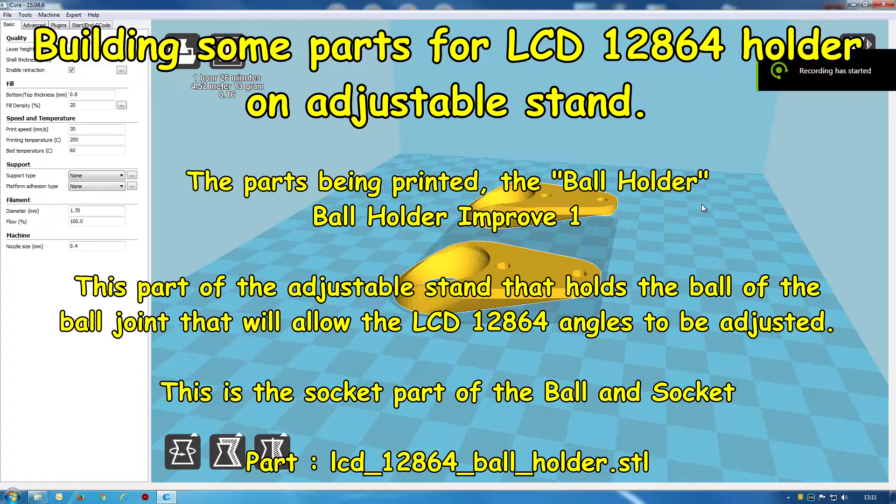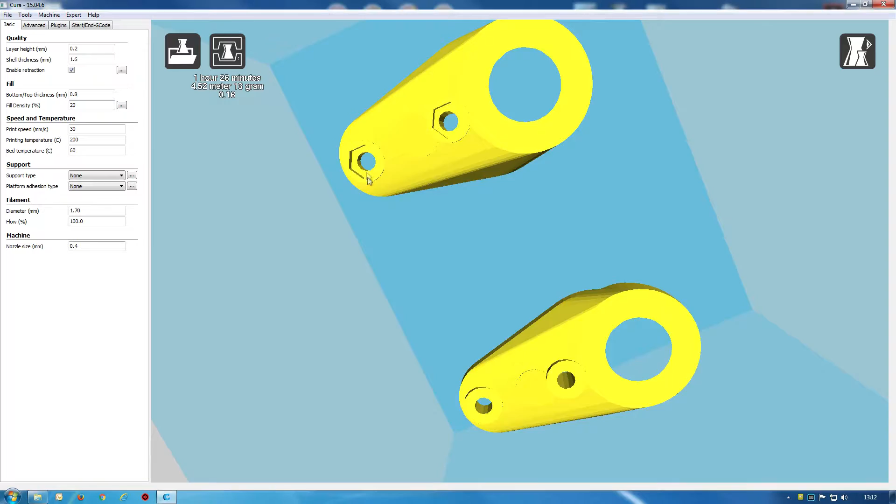I've made some changes to this ball holder part. I've chopped quite a bit off so that the ball joint can move left and right a bit. I've changed the parts here so that a hex-headed 4mm bolt will indent into there. It's got a hex shape.

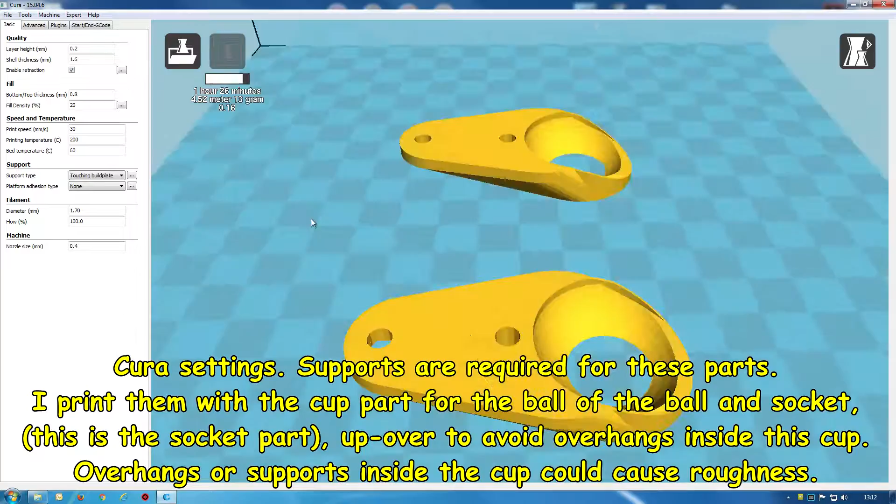On this side there'll be a nyloc nut. This is the way you want to print it, but with supports on, by the way. You do need supports on. Touching build plate. Okay, when you're printing it out.

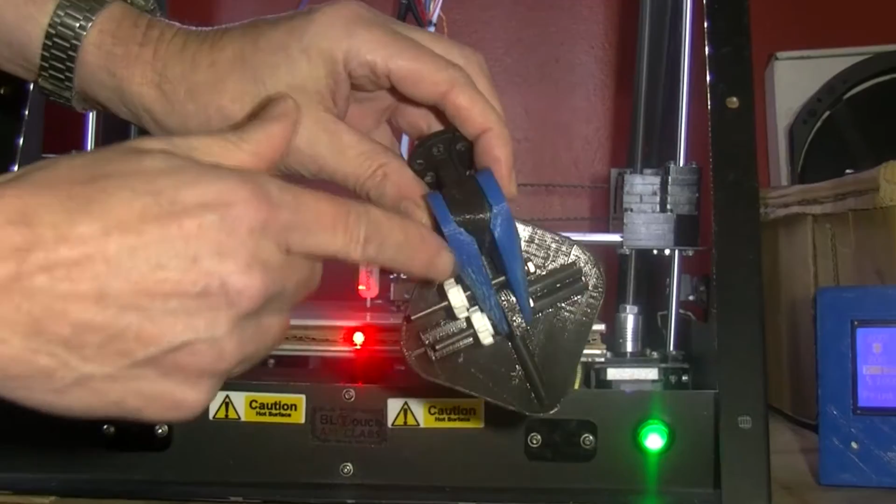This is going to be the improved LCD12864 ball holder. That is this blue part here. On this print I've actually designed it so that this opening will be as wide as it shows you here. I've broken these off manually, but in this next print it will be better.

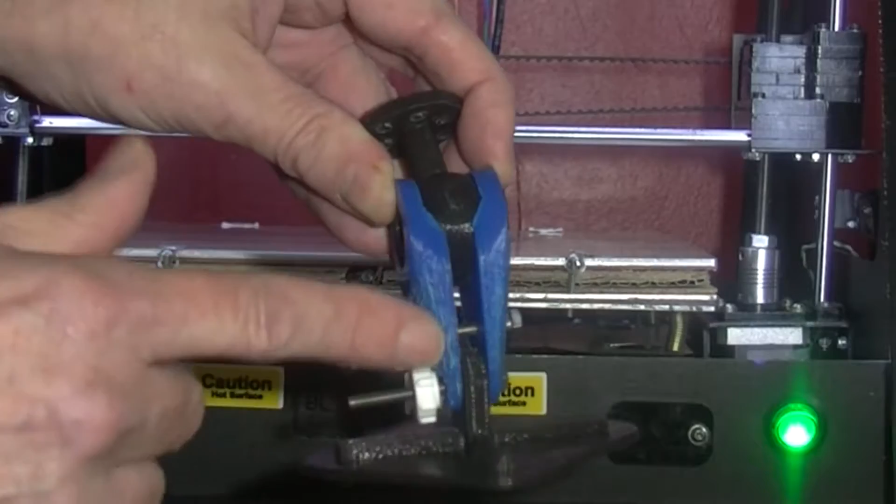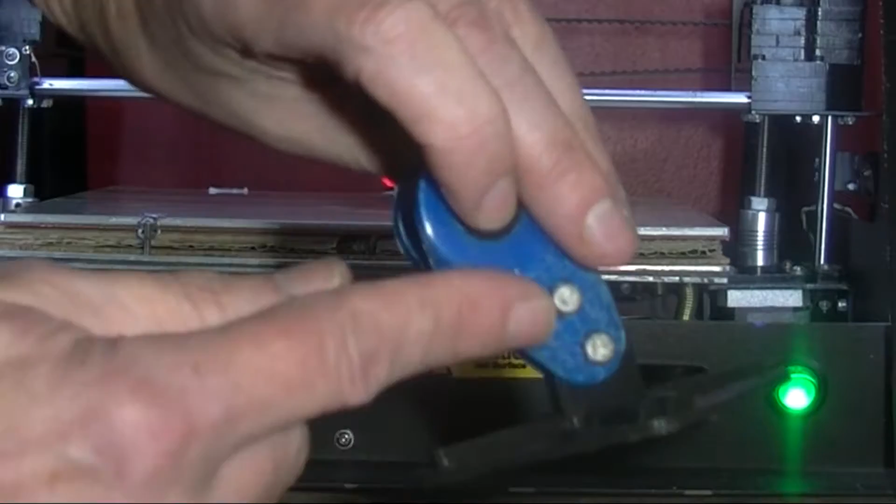I've moved this bolt up as well, so that if you put nyloc nuts on, it won't catch. I put a hex indent on that side so that when you're screwing and tightening them up it will lock in there and the bolt itself won't turn. So basically it's this blue part, two parts in a way. I go on the stand.

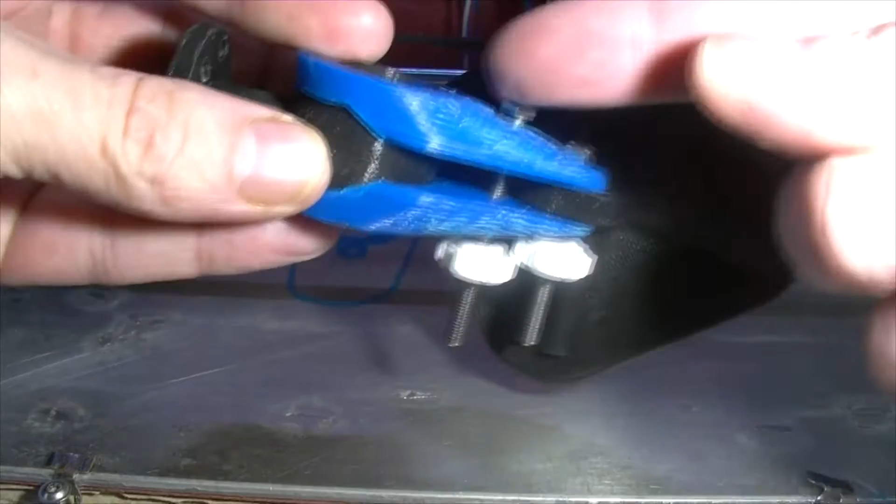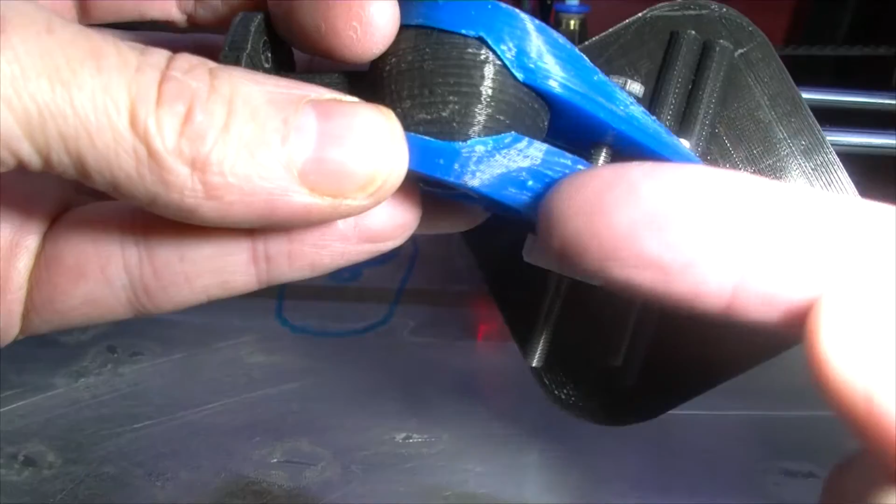Okay, so these are the parts, the blue parts getting printed now, and obviously we don't want a rough edge on the inside there, so it has to be printed this way up.

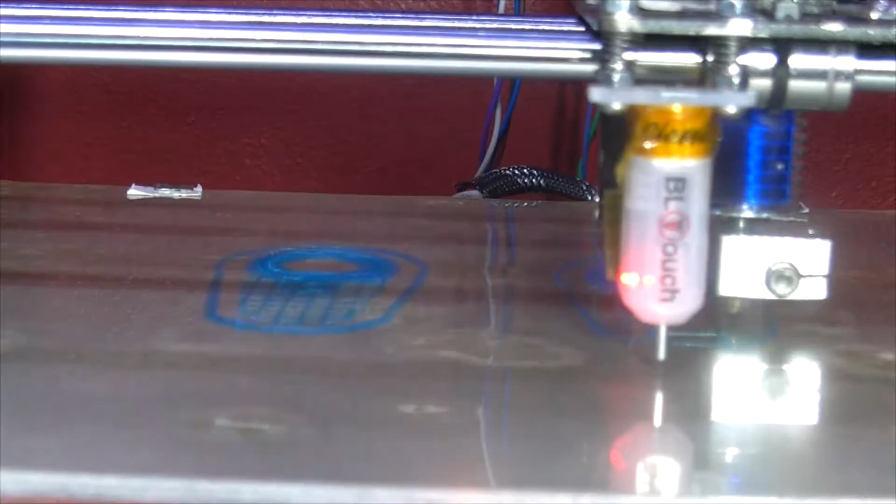It's about a 2-hour print. Just getting some of the lights on. It's a little bit dark.

So it's in 2 halves, basically. Well, not in 2 halves, they're 2 separate pieces to a certain extent, but they work together to clamp onto the ball on the ball and socket. So this is a socket part. I'm calling it the ball holder because it holds the ball.

You can probably see the supports there. This also has 20% infill. Now there is a little bit of difference between each one. They're not totally symmetrical because one has the indentations for the hex-headed bolts, 4mm bolts. That's the plan there.

Got 4mm retraction on this at 40mm per second. That's quite high for an E3D version 6. Mine is a clone. I normally recommend 2.5, but I've had no problems with 4, and I think 4 is better for me anyway. I don't know, I haven't done a definitive test, but I was getting some stringing on a 2-part thing I had earlier. This is a different one, so I haven't done a definitive test.

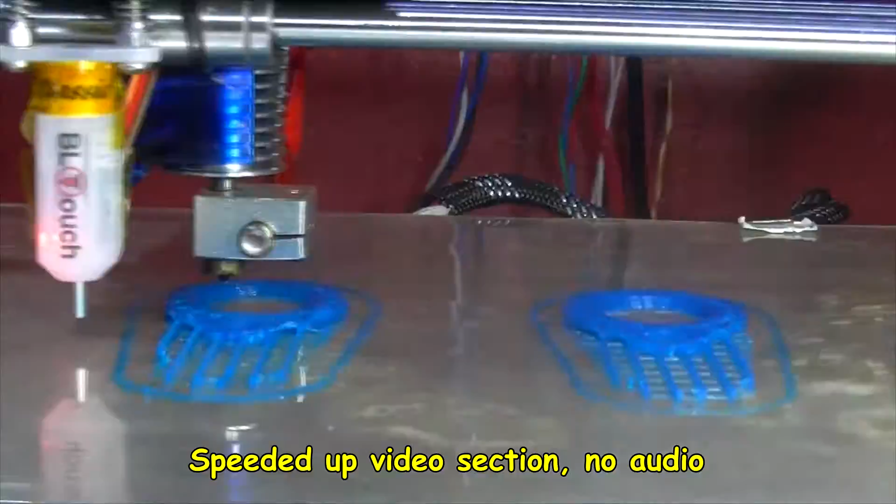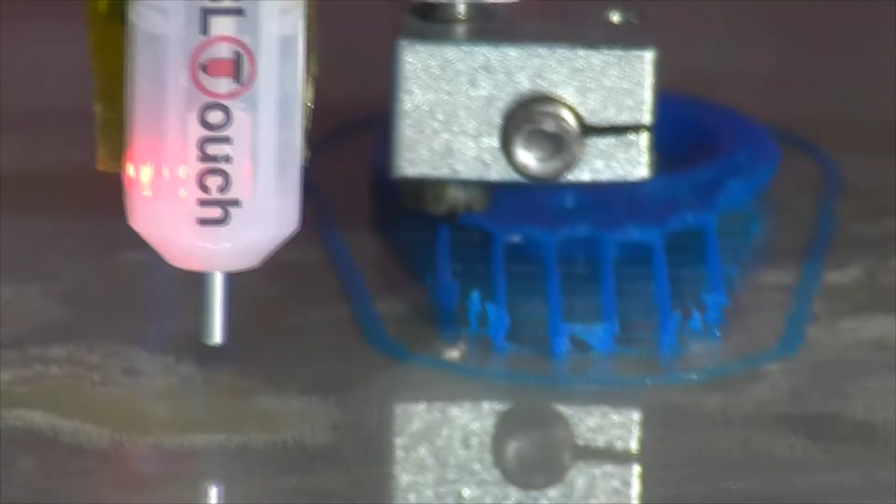You see, it does seem like the nozzle is actually pushing the plastic a bit. That's going on sometimes anyway.

I'm going to stop the video for about an hour, I think, and then I'll come back if I can. 1 hour 32 minutes.

You can really see the supports there, looking at this front edge. And you can also see the infill, set to 20% infill.

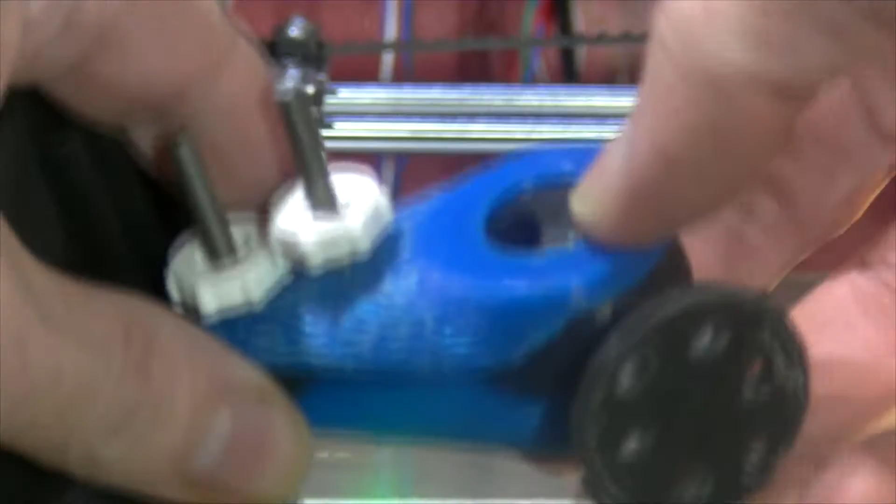So in this iteration I've moved, I'll show you on this, it's easier I think. I moved this bolt here, up more near this circle. I've printed without the original printed edges on here. I've broken them off on this to test it out. That's so that this ball can move side to side.

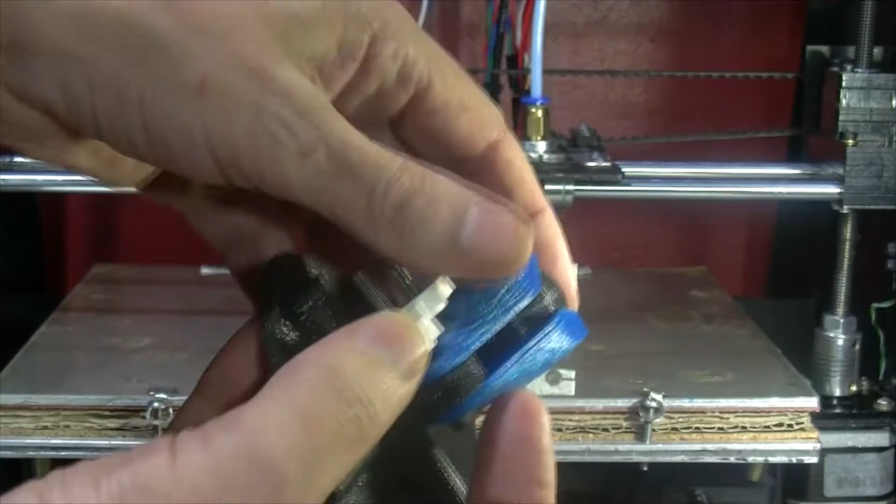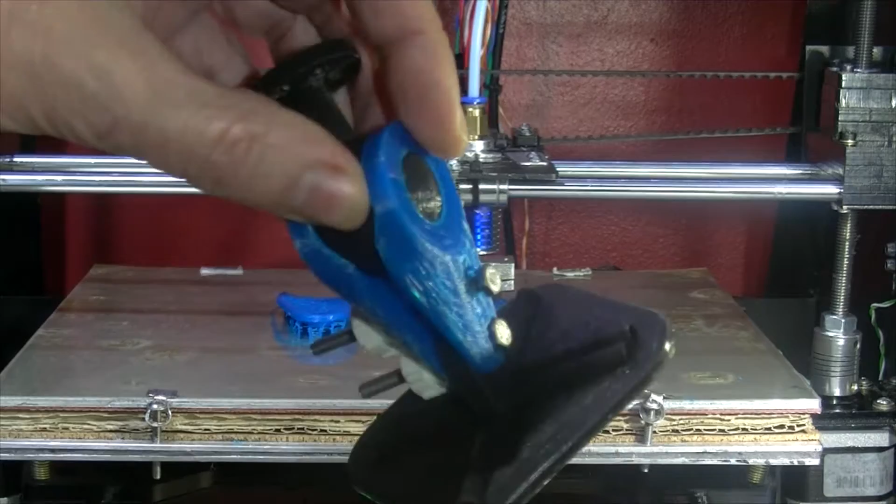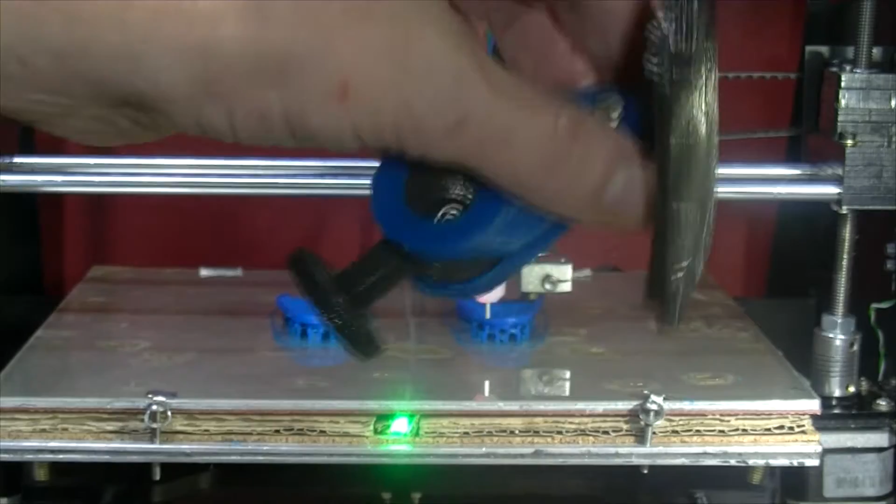So it's getting printed. Which way is it getting printed? This way up, in a way, with the cups up over, so there's no supports needed in the cups because they have to be kept pretty smooth so that the ball can move about in the ball and socket. So that is basically the stand. This is hopefully an improvement.

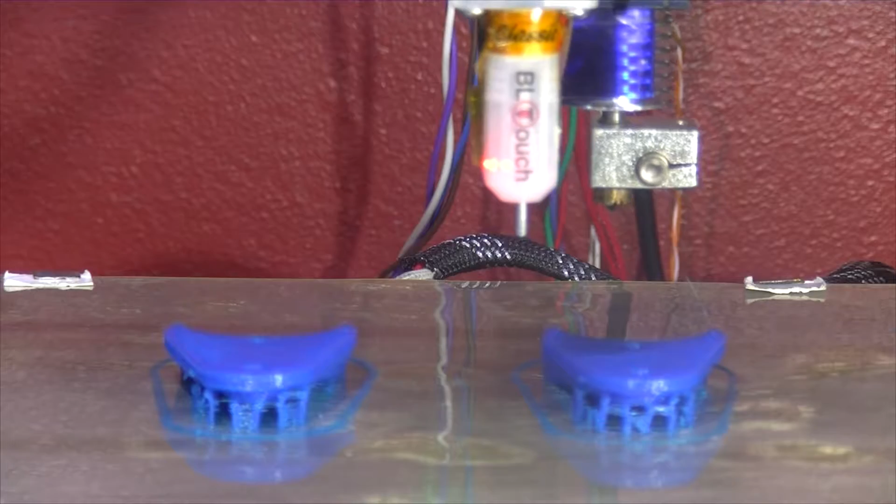I'm going to pause the camera and come back later, probably when it's finished. Well, there we are, finished.

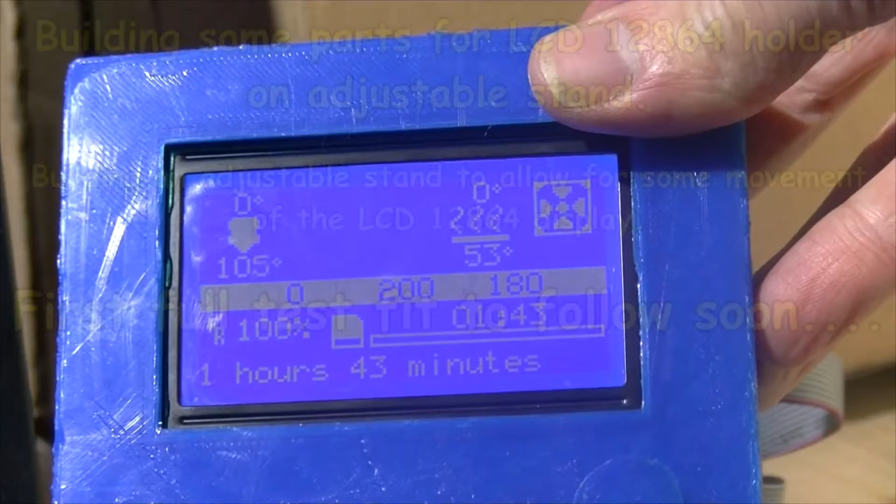Try and get the time. Turn this light out because sometimes the lights dazzle the time on the display. 1 hour 43 minutes. Wait until the bed cools and then we'll see about getting them off.